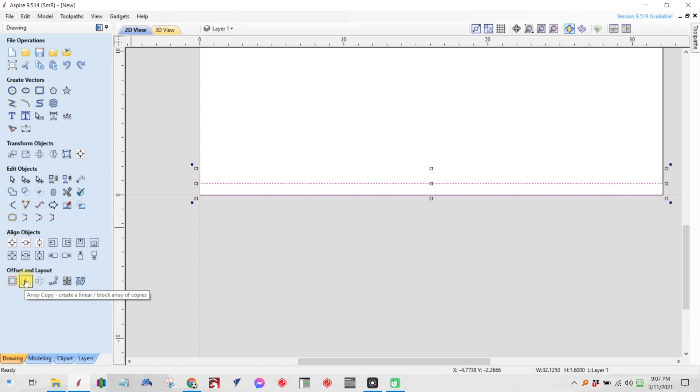Now from here, this is pretty simple. We're going to go to the array copy down in the lower left corner in offset and layout. It'll tell us the size of this. It's 32.125 by 1.6 inches. That 1.6 is important. We're going to put about 24 rows up, one column to the right, and then the 1.6 inches in the Y direction. X to the right, Y positive up. It's going to make a copy every 1.6 inches up 24 times.

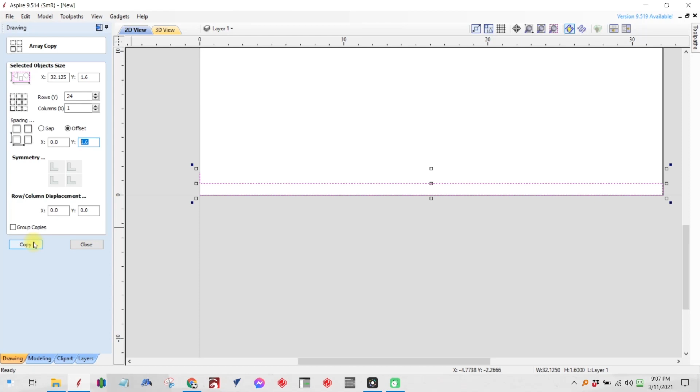We hit copy, and now we see what ran off the edge of our board, so that's good. Hit escape, and it clears us out of that menu. Now I'm just going to select and delete the extra off the top. Now we've got the raster ready to go for our spoilboard. And you'll see it's not connected. These are still individual open vectors. But even better, we don't have to close them or make them one solid vector.

As you'll see here, when I hit N for node, it starts here on the lower left, it goes up and finishes. We click the next vector, it starts in that same point. Since we copied a vector that had a known start position and went in that order, it'll continue to go in that order. So hit N for node off.

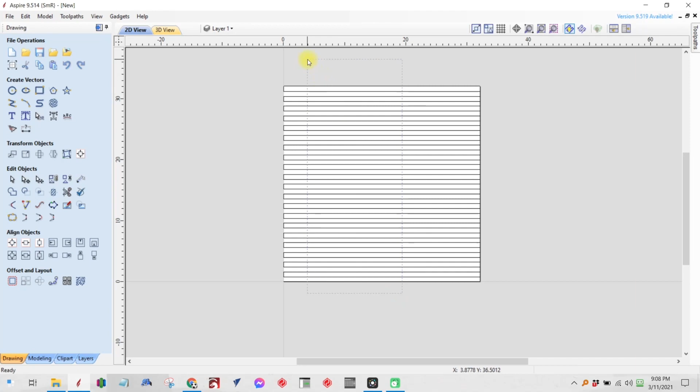So let's make our first spoilboard toolpath. We will select all that, switch on the top with the arrow to toolpaths. The first thing we always do on the toolpath side is hit set and verify everything. Thickness, our datum is in the lower left corner, and we're on material surface. And if you need a clearance height, that's fine too. The Z gap above material, I always set at about 0.2. If you have anything on there that you don't want to hit, that's a good place to set that.

Notice there's a Z1 and Z2 on a Onefinity. Both those are the same. So we're going to continue on. I'm going to hit Profile Toolpath, and we're going to make this a profile on-line cut. So we'll start up here at the top. Always get in a habit when you're in VCarve or Aspire to go in the order of left to right, top to bottom. It will take care of you.

So we're going to start at 0. We're going to cut depth to 0.02 deep. We're going to select our tool. I've set up a surfacing bit, but if you don't have one, I'll show you real quick. Just grab an end mill, copy it. When you get the copy, we're going to change the diameter to 1 inch. We're going to change this up here and call it surfacing whiteside bit 1 inch.

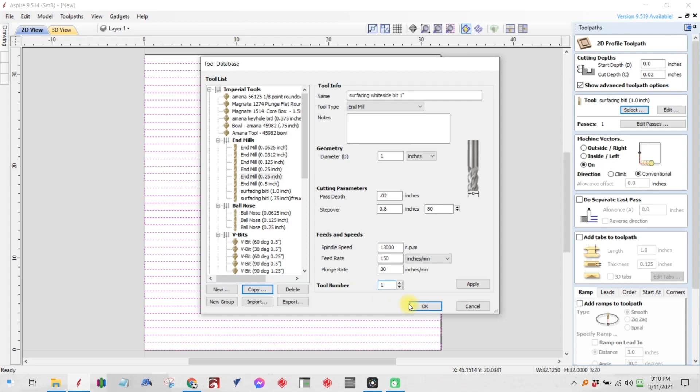I usually run about 13,000 RPM on this and 150 or 200 inches per minute, but I'm going to slow the plunge down to real slow, 30. Since it's a 1 inch tool, I'm going to call it tool number 1. So I'll apply and OK. You can see it selected. It's going to make one pass on the line.

We're going to add ramps, and actually, for right now, just take the ramps off. It's a good idea to get used to using these. Set it as a ramp, but we're going to do another profile first, and this one will not be needed here. So we'll rename it, and this will be raster profile 1 inch spoilboard pass 2. I'll show you why that pass 2 is important in a minute.

Tell it to calculate, and there's our toolpath. And you can see it's going to start in the lower left corner and go back and forth till it finishes at the top left corner. So real quick, we're going to run back over and set it on 2D view, and we're going to create a rectangle around this whole outside of our spoilboard at the extents.

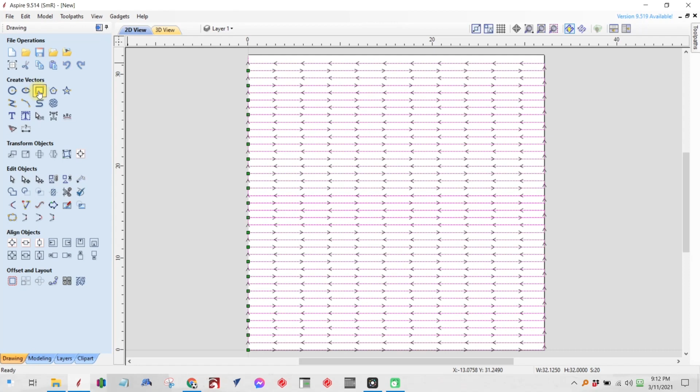So we're going to set lower left corner 0, 0. We're going to make sure this is set to square. We don't want any rounded corners. And then we're going to set the width at 32.125 and the height at 32.125. Hit create. Let's go back to the toolpath side. We'll turn off that, and you can see that vector. We hit node, and you can see it made a vector that starts in the lower left corner and goes up and around and back.

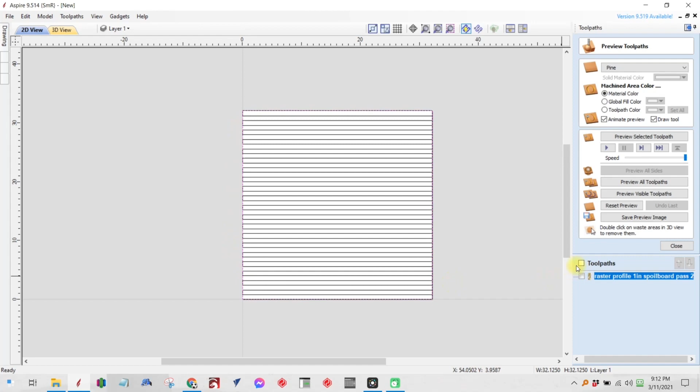So with that selected, we're going to hit profile again. We're going to leave the same parameters. They hold the same parameters between cuts, so it holds the same tool. We're going to start at 0, cut depth 0.02 using a Whiteside 1 inch bit. On the line, add ramps. 3 inches is a good ramp on this, and then we're going to call it profile 1 inch spoilboard square pass 1.

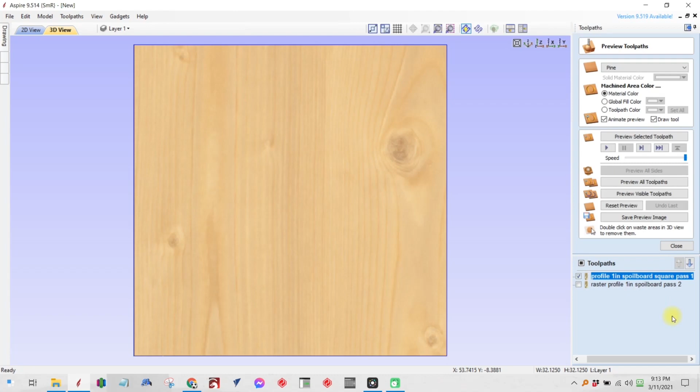And now to change the order, I'm going to click on the bottom one and just move it up, and that way we have both of our files. You can see both of them here. You can see them laid out on the 3D view. Now that is all we have to do, keep this pretty simple and go run this file.

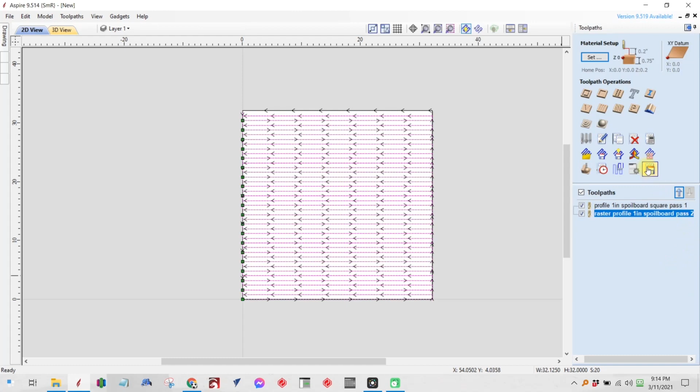Hit close. We'll hit save toolpaths. Make sure you say output all visible toolpaths to one file. We use the same tool; the number of the tool is number 1 for the 1-inch spoilboard file. We select Onefinity and save toolpath. Now I can call this 1-inch white side spoilboard file for Onefinity.

And then this is for video. Now I've got my file saved. I can come up here and save my file, save as, and I'm going to name it the same thing with for video.

Now I'm going to show you something else, since you won't run this file real often, but you'll want to keep it and run it. Once you've got the G-code file made, just rerun it occasionally when you want to clean up your board. When it starts getting roughed up, go up there, home it, set 0 to all.

Then you will flip your probe upside down on the spoilboard and 0 the Z with your spoilboard bit in it on top of that probe upside down. When you're finished, put your probe up, pull the magnet, hit play, start your router, and let it run. You want to make sure and let this run until it's touched all the spoilboard.

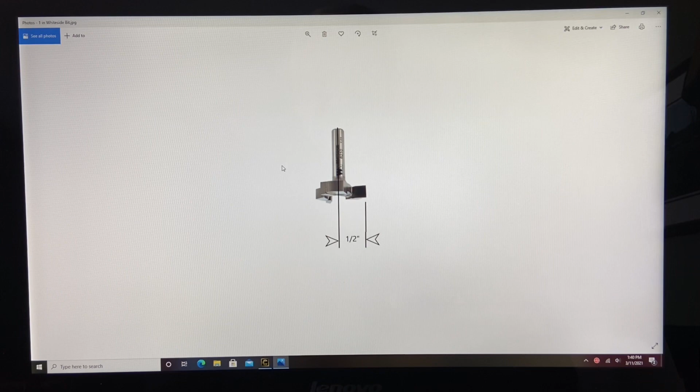If we were to look at the actual bit itself, it's a 1 inch diameter bit. So from the center line, you have a 1/2 inch radius on either side to give you your 1 inch diameter. So the maximum size that the center line of the router and the shaft of the bit needs to travel is going to be 32 inches by 32 inches, which is inside of the cutting area of the Onefinity. And that's why we're doing 33 by 33, in case our spoilboard is just a tad wider or longer than 32 by 32.

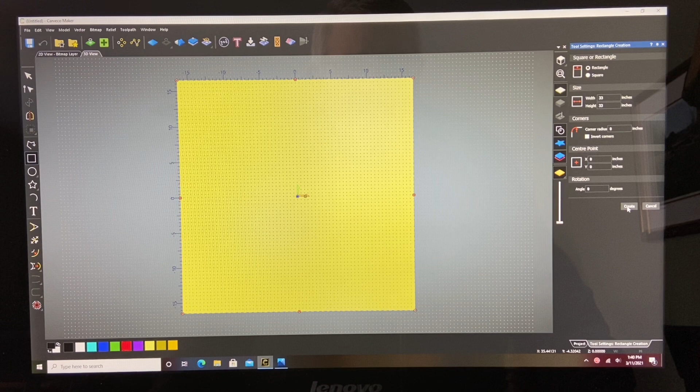Okay, the other thing I like to do when doing the spoilboard is to put my origin point or datum point in the center. So we'll hit OK. All right, so there we are. We then come in and create a square from one corner to the other, and that's 33 by 33, and you can verify the dimension here under the size. We'll go ahead and create that. Now that the square is created, we'll come in and we'll create the toolpath.

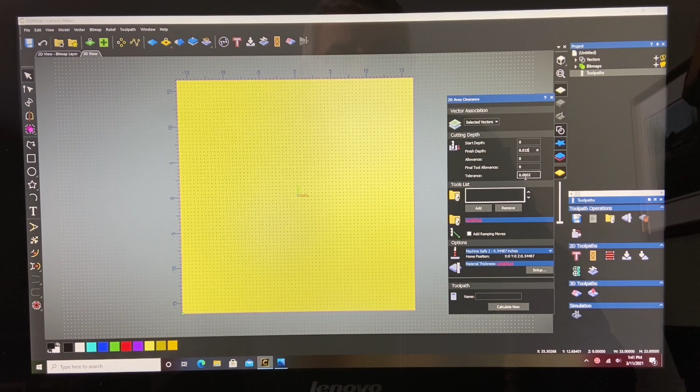So we're going to do an area clearance, and what I do here is the start depth is 0. The finish depth, I'm going to do 1/64 of an inch, which is 0.015. And we're going to go ahead and select the 1-inch surfacing bit, which is right there. Once you've selected that, it gives you some of the cutting parameters of that bit, and the feed rate is showing as 80 and the plunge rate is 30. A lot of the software programs are very conservative on their feed rate and plunge rate.

Because we're only taking 1/64 of an inch off the spoil board, we can certainly increase that speed, and I'm going to move this from 80 to 130 on the feed and from 30 to 50 on the plunge. The other thing I'm going to do is look at the offset strategy for clearance.

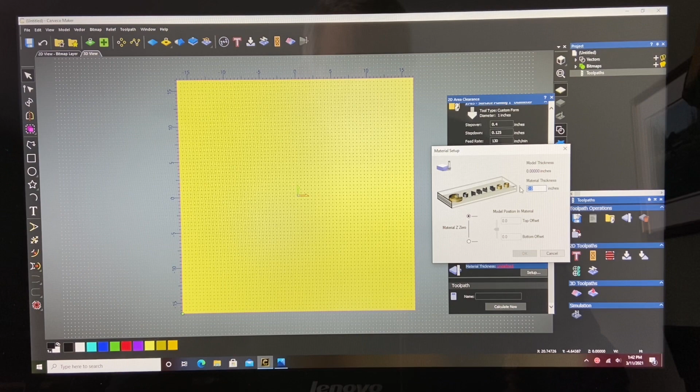What that will do is it will start in the center and start working its way out in a square pattern all the way till it hits the edge to clear that. And then the last thing we do is set up our material to 3/4 of an inch thick. And we'll hit OK. So we can give the toolpath a name, or you could just leave it blank and hit calculate, and it will populate a name for you called Area Clear.

So as you can see, because of this strategy, it starts in the center and it works its way out. And so you have concentric squares going all the way from the center to the outboard edges. And I like using this strategy because, as you can see here, you have horizontal lines on the front and the back, and then you have vertical lines on the left and the right.

If you run the strategy and you run your hand over the spoil board after you've surfaced it, and you could feel ridges where your nails catch on it, looking at these lines and the ridges that are in your spoil board will dictate which direction you have to tilt your router head to get a smoother, flatter surface. So that's why I like using this strategy. 9 out of 10 times, there's very little tramming that needs to be done.

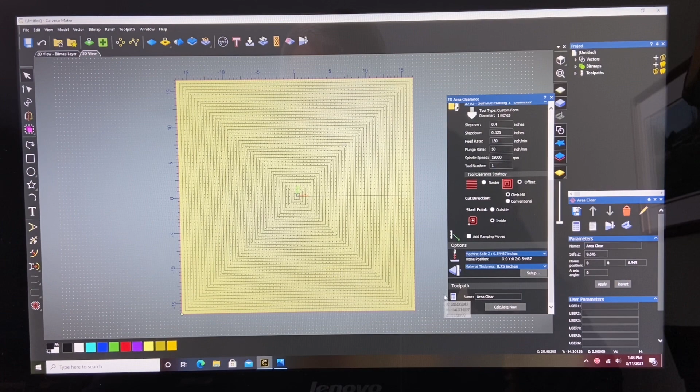So now that we've got this calculated, we can go ahead and save the file, and we'll save it under surfacing 1-inch diameter bit. We'll hit save. We'll go ahead and copy that to a USB thumb drive, and we'll take it out to the shop and start surfacing the board. Okay, one of the first things that we do after we've turned our machine on is home the machine. So let's go ahead and do that.

So what I like to do is to take a reading to find out the height in about 4 or 5 different locations, and I'll use the probe to do that. Be careful, some surfacing bits won't probe real well, and you'll start driving that into your probe. So always check the continuity first.

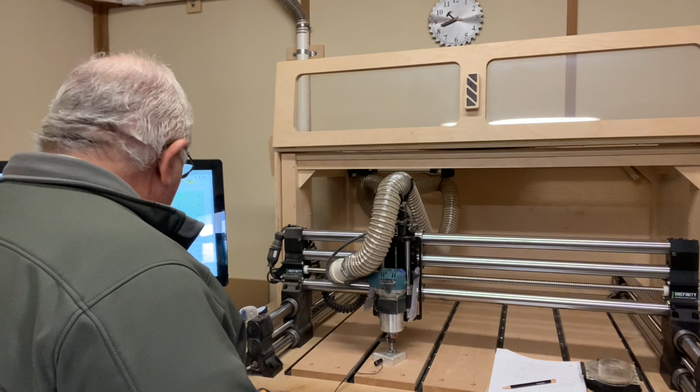Okay, so as I look at this, it's showing our absolute as minus 4.344 inch. So I'm going to mark that down. Front left is 4.344 inch. And now I'm going to move to 3 or 4 more locations on the table, and we'll try doing that again. Okay, so we'll probe back here. Okay, we'll hit probe Z.

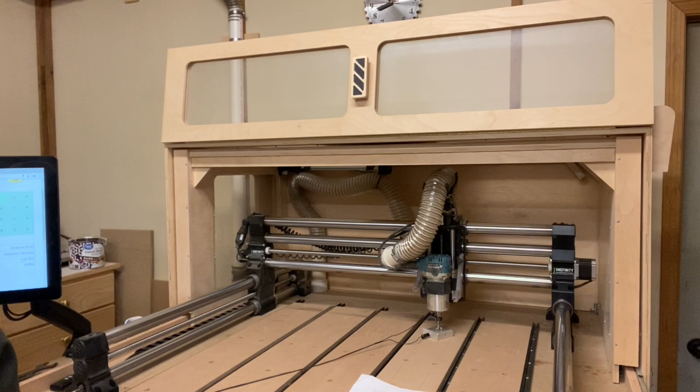Okay, so over here we've got 4.327. And we're going to probe here for Z. Okay, so here we've got the right rear, and this one has minus 4.361. So far that's the lowest spot on the table.

Okay, we'll take a reading here, and we'll probe Z again. Okay, here's the front right, and it's minus 4.368. All right, so the front right is going to be the lowest point. So what we'll do is we'll set 0 there.

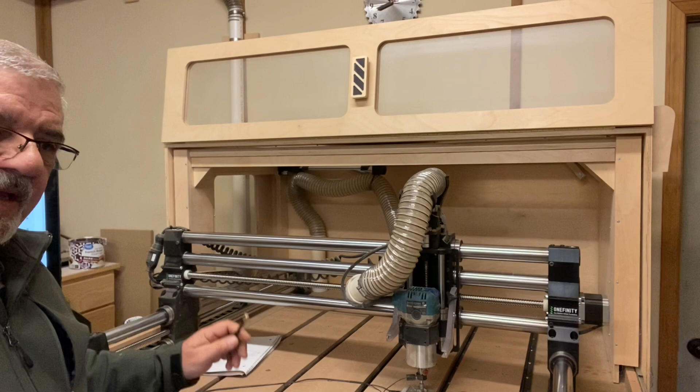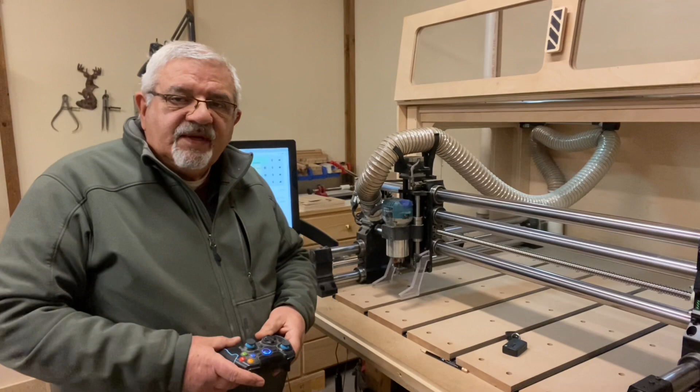The reason being is if you take it at a high point and you're only taking off a 64th, it's not going to get down to that low point. And so consequently, you're going to have to take multiple passes at it. So we'll set it at the lowest point. Now that we have the Z0 set, we need to set the X and the Y.

The Onefinity cutting area is 32.126 inches by 32.126 inches. And as you recall, we set our origin point for the surfacing file to be in the center. So we need to zero our X and our Y to 16.063 inches for X and 16.063 inches for Y.

Now you could do it with your joypad. And as you watch the screen, you can see how close you're getting to it, and then you have to jog a little bit to find that 16.063.

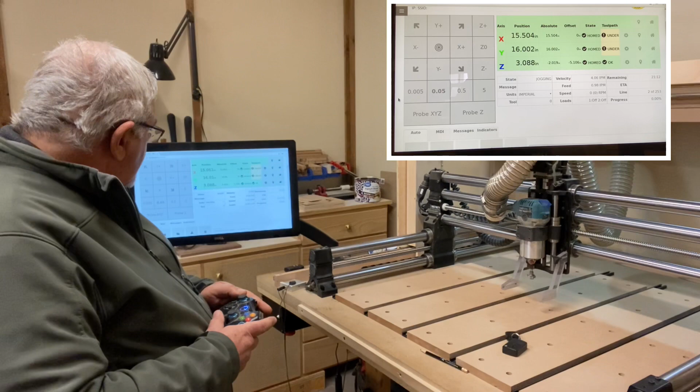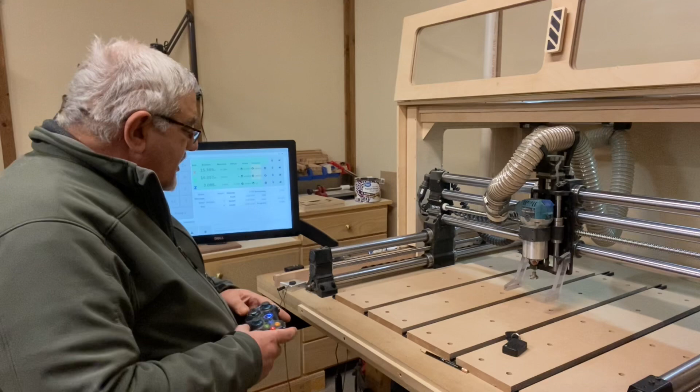And it's very fussy to hit it right. So I like to use the MDI command. And so basically, let's return this home. Okay, so in the MDI command, you would select the MDI tab, and you have two different commands. You've got the G00 command, which will move at the rapids rate, and the G01, which would move at the feed rate.

So if you did G01, X 16.063, Y 16.063, it would move over there, but it would move over at a probably slower rate because the feed rate is not as fast as the rapids rate. So I like to use the G00 command with the X 16.063 and the Y 16.063. So I'll do that right now.

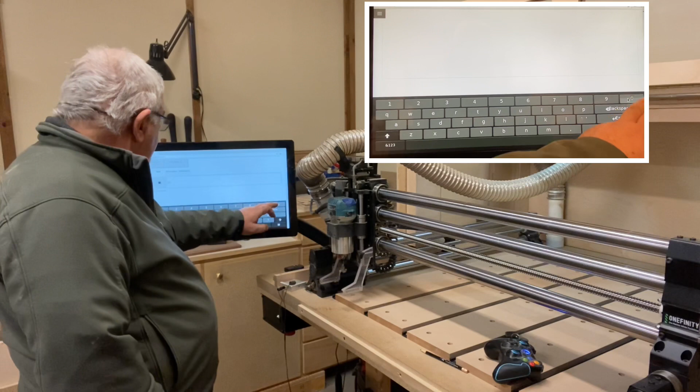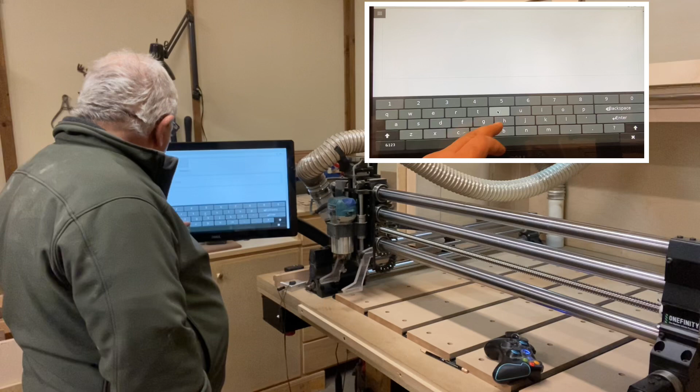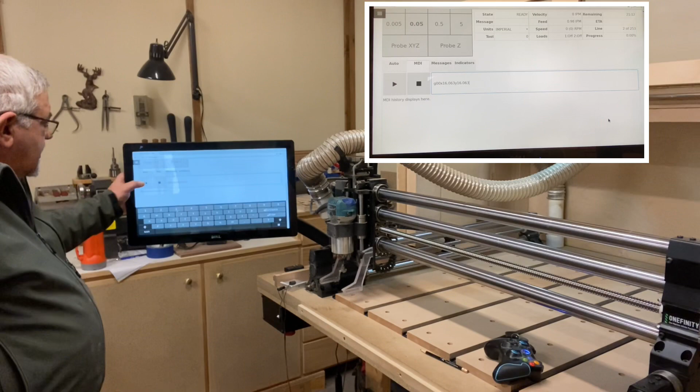I'll just enter G00 X 16.063 and Y 16.063. And then I'll hit the play button, and you'll see the machine move. And it goes right into the middle of the cutting area.

16.063 times 2 would give you 32.126. So that's why we do it that way. And it's always going to be smack in the middle of your board, middle of your cutting area. In this particular case, because we're using the 1-inch surfacing bit, we know that it can technically cut up to 33 inches following a 32-inch path.